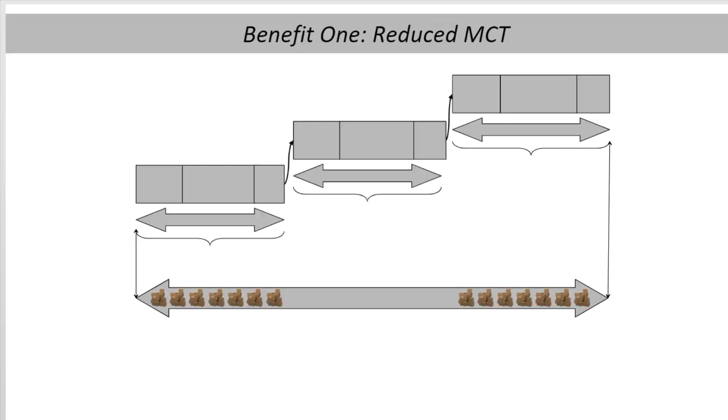Benefit number 1, reduced MCT or manufacturing cycle time. Why is manufacturing cycle time shorter in a flow line? The main reason is that the processes necessary to build the product are linked and balanced. When processes are linked and balanced, the product moves from process to process in an uninterrupted manner, and that uninterrupted movement we call flow.

When products are built to work orders that reflect the bills of materials, you build subassemblies that are moved from department to department, accumulating standard minutes. After the work order has been scheduled and has waited on the floor to be worked on, the actual work or production time takes place.

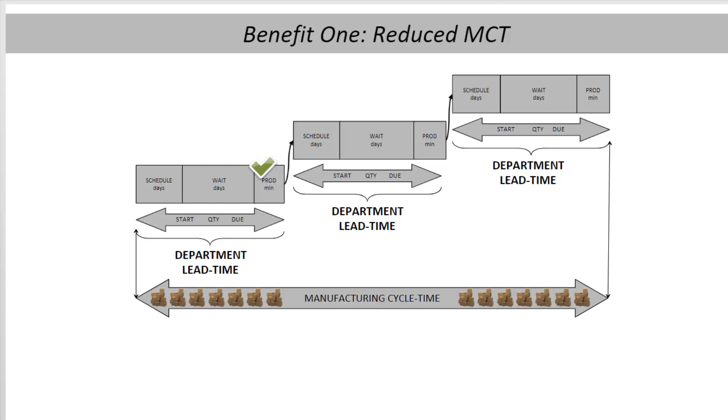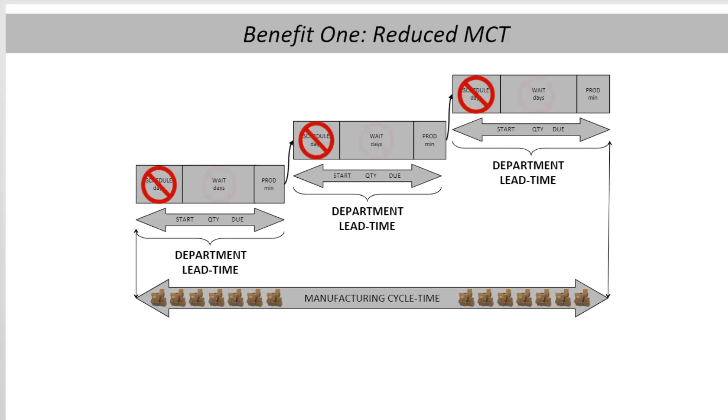If you look at the relative duration of these three elements, schedule, wait, and production, you can confidently say days, days, and minutes. The idea behind establishing a flow line is to eliminate the department-level scheduling to replace it with work signals. Then, through linking and balancing of the processes, eliminate the wait time, leaving just the production time.

It is common to see improvements of 70% or 80% or even 90% when a manufacturer goes from traditional batch scheduling to flow. Let's look at the many other benefits derived from implementing flow manufacturing.

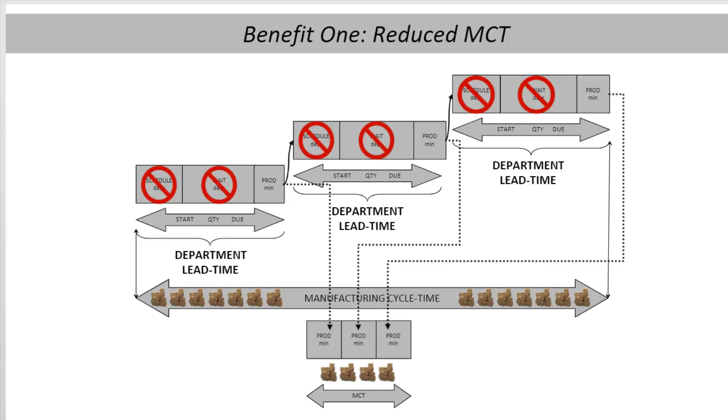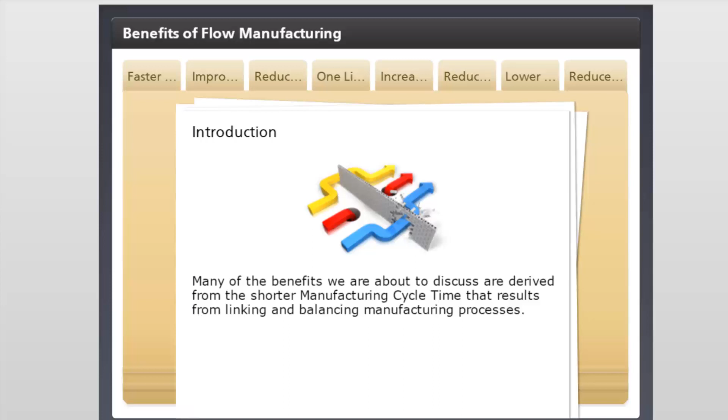Introduction. Many of the benefits we are about to discuss are derived from the shorter manufacturing cycle time that results from linking and balancing manufacturing processes.

Faster customer response. By reducing the time it takes you to make the product, the manufacturing cycle time or MCT, you can significantly improve your ability to deliver the product faster to the customer. The customer response time is the time from the receipt of the order to delivery of the order.

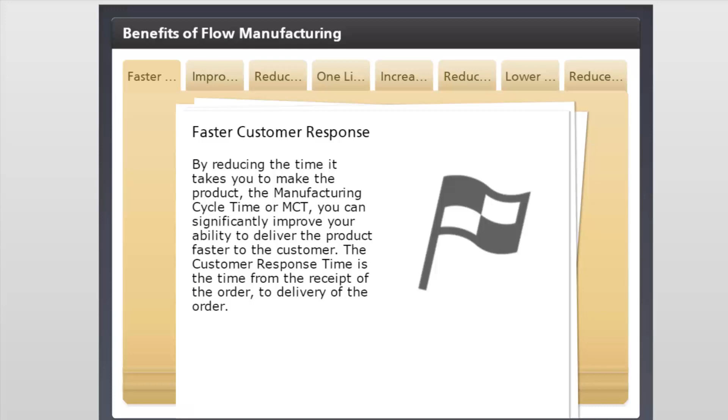Improve quality. By arranging workstations to work progressively, flow lines facilitate the implementation of quality steps that double-check critical product features. These quality checks are aided with the use of operator method sheets that indicate when to perform these checks and in what sequence. You probably know these checks as TQC and verify.

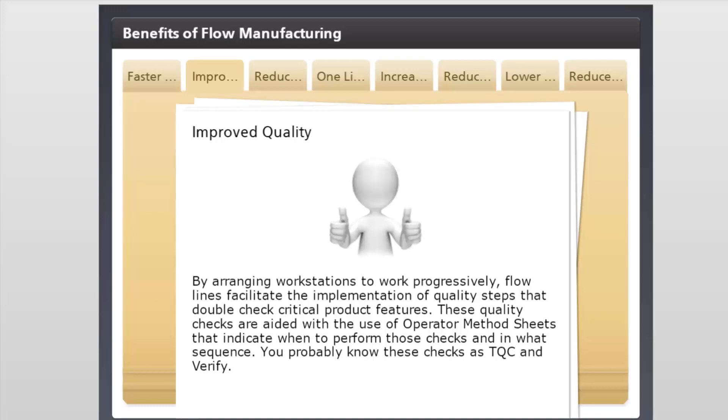Reduced floor space. Embracing a flow manufacturing strategy means that all these batches go away, and especially the warehouse of work in process becomes unnecessary. All that floor space can now be used for making product, rather than storing it. As important, if not more, is that the inventory that went away becomes cash that does not have to be reinvested in materials. A better cash position makes your company much stronger.

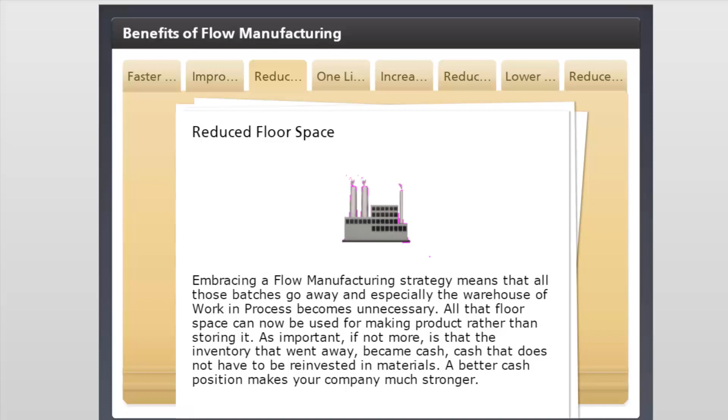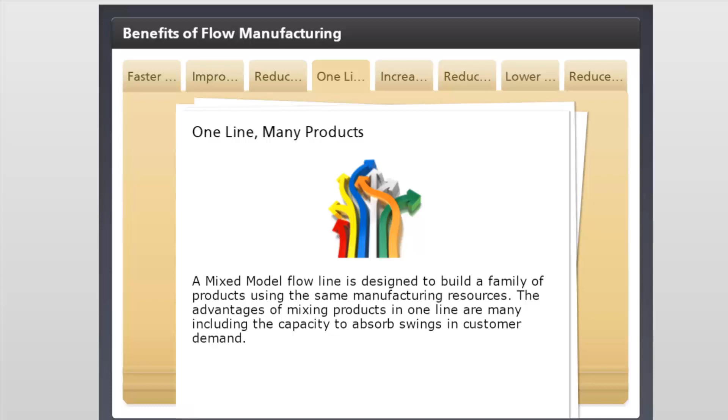One line, many products. A mixed model flow line is designed to build a family of products using the same manufacturing resources. The advantages of mixing products in one line are many, including the capacity to absorb swings in customer demand.

Increased flexibility. Arranging workstations in a sequential manner opens the door to implementing a tool known as operator flexibility or flexing. Flexing means to move to where there is a blockage in the flow. This is done in a very structured manner based on demand signals. Flexing is not moving around looking for something to do.

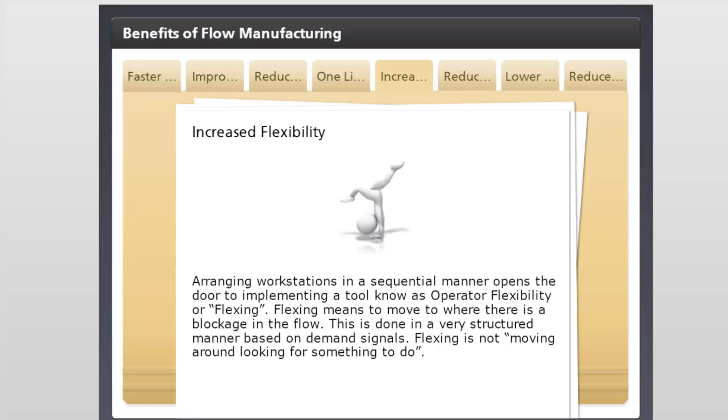Reduce waste. Many forms of waste are eliminated when processes are linked and balanced, and the product flows from process to process in an uninterrupted manner. But one that is clear and very evident to the naked eye is the substantial reduction in the amount of walking that takes place in the new line.

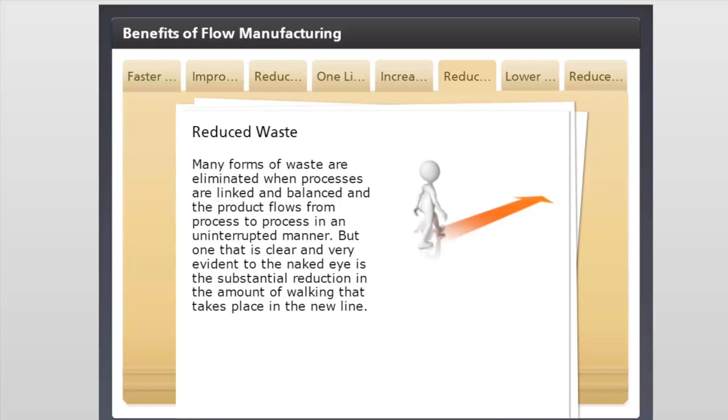Lower inventory requirements. By eliminating batch building, the many piles of partially completed products that litter the floor of a traditional factory are no longer necessary, and all that floor space that was occupied by those piles can be reclaimed for more useful uses, like building products.

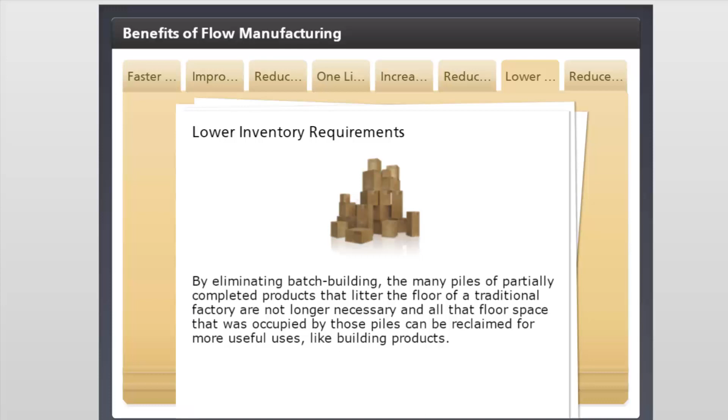Reduced working capital. Working capital is a measure of how much cash is tied into the factory's daily operations. By linking and balancing processes, there will be a substantial reduction in work-in-process inventory, followed by reductions in raw materials and improved labor utilization, and all of these will contribute to better asset management.

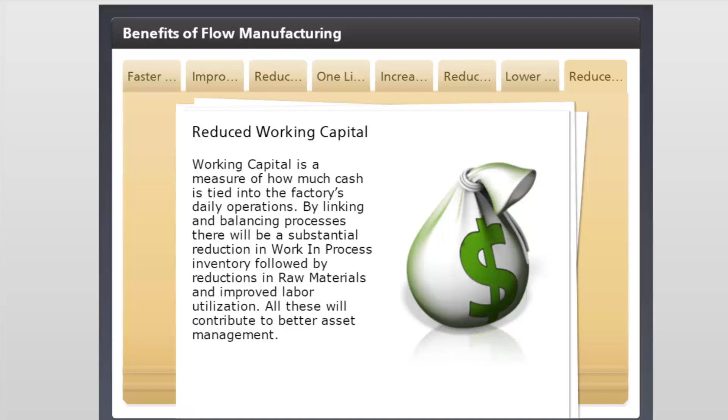These are just a sampling of the many benefits of implementing a mixed model flow line. This concludes this memory jogger on the topic of the benefits of flow manufacturing.